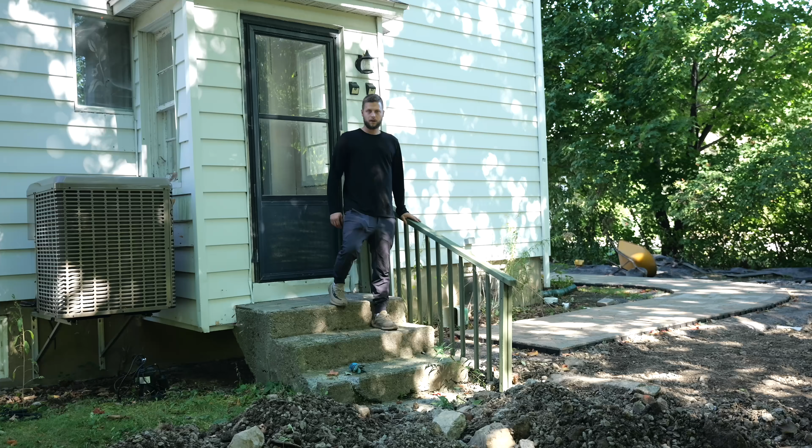Can you guys see the problem? How about now? Now can you see the problem?

In today's video, we're gonna be ripping this off and building a whole platform, a deck, a wooden deck with stairs going this way and towards the backyard.

This is my mother-in-law's house. Recently, I did the entire paver driveway DIY, so you could check out that video afterwards. We're gonna leave the concrete steps there and use them as the foundation for our deck.

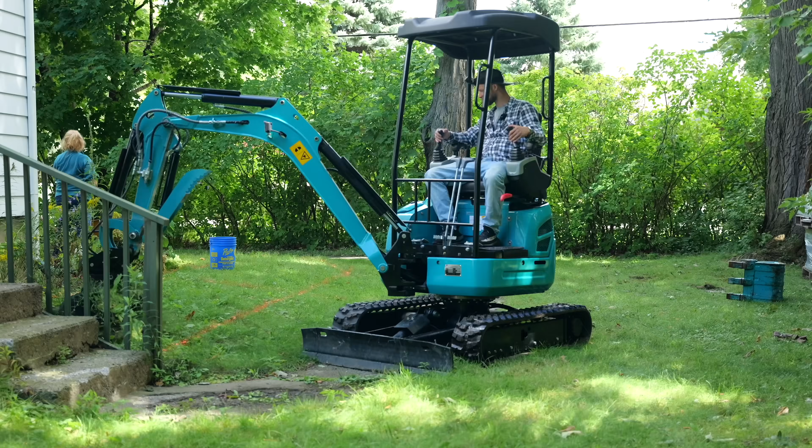So you're probably wondering, why in the world did we make a path here? Well, the previous path was very long, tedious, and all broken concrete, and we decided to level out the whole yard and the entire path all the way to the new driveway we did, having better access and a shorter distance to the driveway.

We're probably gonna go with treated wood. But before that, I wanna show you how I leveled out the yard. So let me give you the inside scoop here.

I posted on Marketplace that I wanted free dirt. Go ahead, I don't want to wreck your movie. Don't worry, it's just a YouTube video.

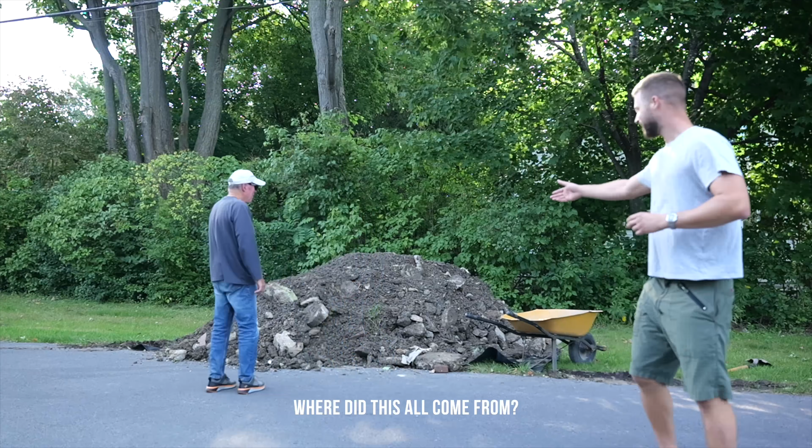What, how I dug a hole? Yeah, about how I just got - where's this all come from? A guy gave me free dirt. He told me there's a few rocks in it. Yeah, it looks like concrete. Oh well, you live and you learn.

That's probably gonna take me a few days. Good luck. Thank you, I'm gonna need it. Oh my God, I don't have the excavator anymore, I only got a wheelbarrow and a shovel.

So yes, Marketplace for this kind of stuff could be good, just like it could be pretty bad. I spent the next couple of days, I don't remember exactly how many hours, but it was a lot.

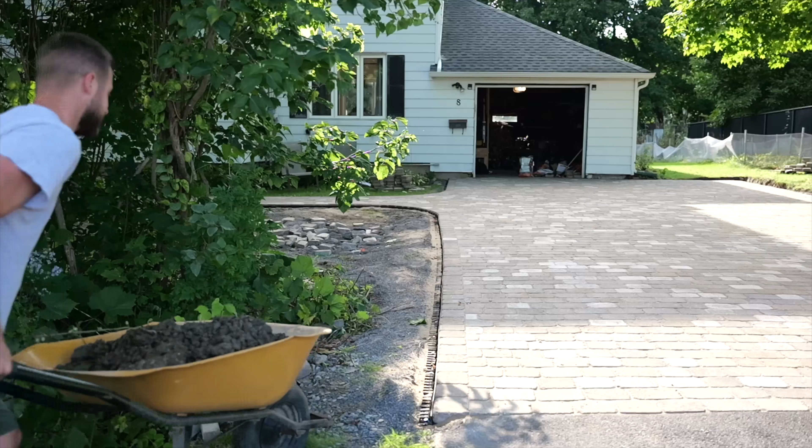In those 10+ hours, I got to experience the difference between a wheelbarrow and a Gorilla Cart. I'm gonna show you why I prefer a regular wheelbarrow versus this $300 Gorilla Cart I bought. It said it could hold up to 1,200 pounds. Just imagine me pulling or even lifting 1,200 pounds of weight.

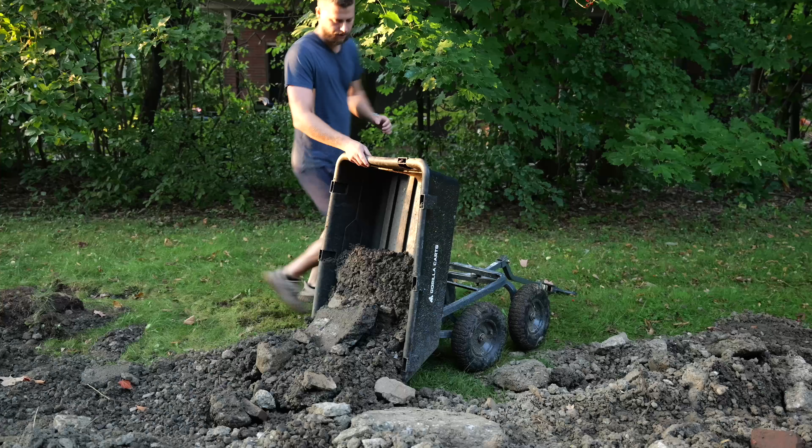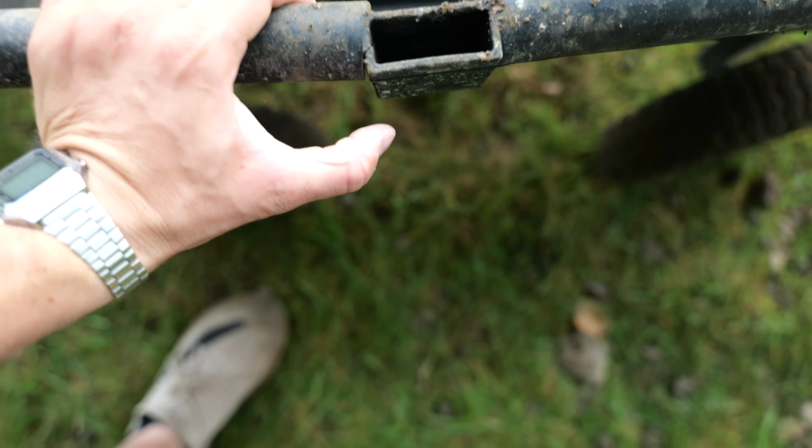It might have a few pros, but I think the cons far outweigh it. It might be good at just transporting pavers or something you want to pick up from it, but as a dump cart, don't buy one. Cracked right there - it just cracked for me raising it up and dumping it. The wheelbarrow, on the other hand, is old school, but it's super damn convenient.

I really thought I was gonna do this all by hand, but I wanted to get back to building the deck, so I rented an excavator for 24 hours to get it done.

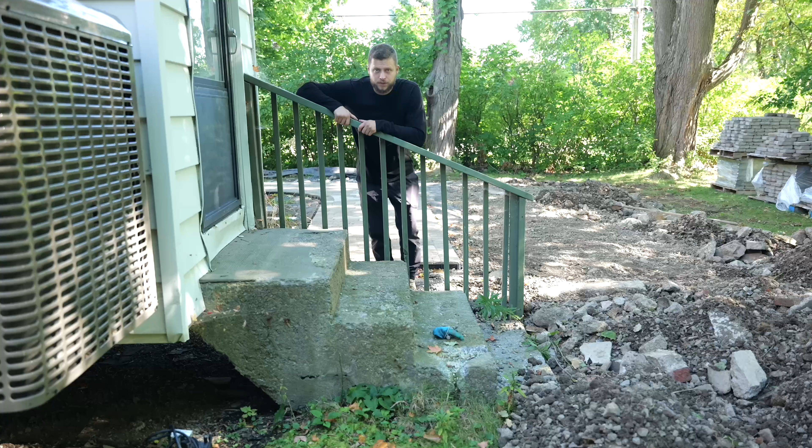Now, let's get back to the deck. So you might have noticed that these stairs look completely destroyed, and that is correct. I believe these stairs are probably 60 years old, maybe a little more. They've been repaired and patched. As you can see, it has definitely settled because it's been many, many years.

So we're gonna leave it right here. We're gonna build on top of it. And that's the challenge today, is to see how we could build it.

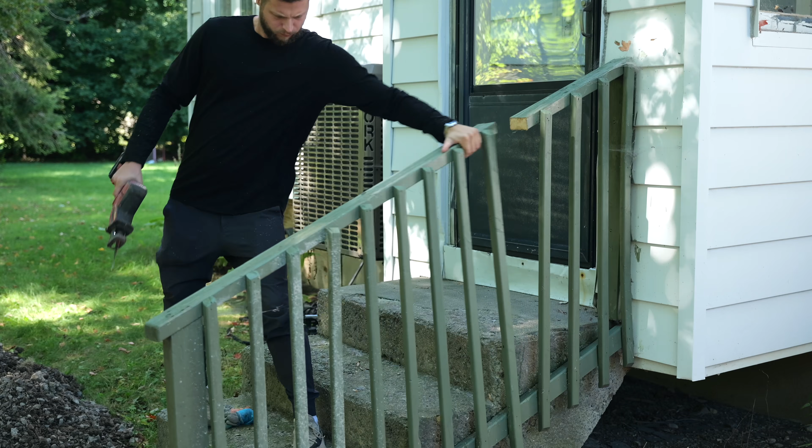It's really too bad that this is nailed in through the siding. I hope we're not gonna damage the siding or... Oh shit. Oh crap. When starting a project, there's always the unexpected, right? Okay, here we go.

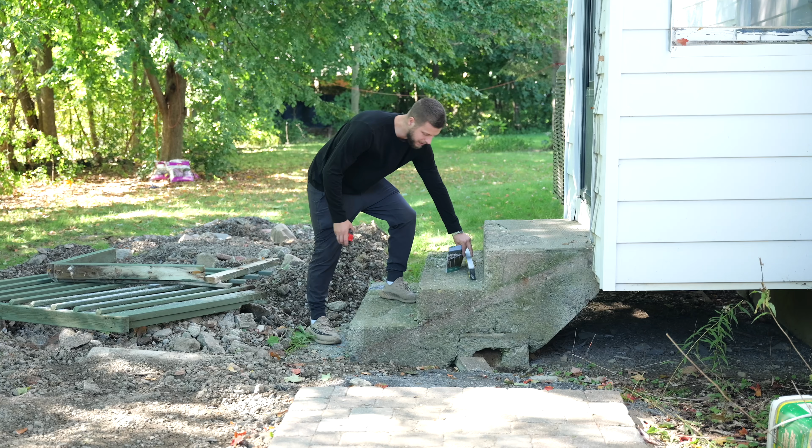All right, now that that's out of the way, I will be measuring. What I want to do now is build out something that comes out of here, elevated, so that we could use this as a base to anchor. That's gonna be the first step to everything.

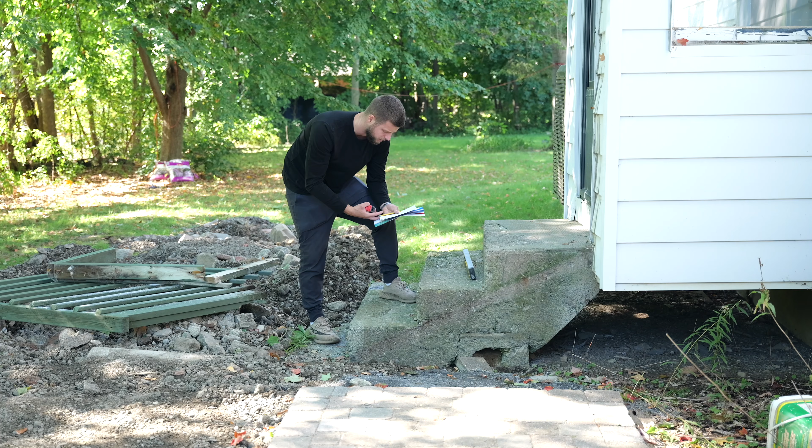So I got my paper and a pencil, and this is how I'm gonna be starting off. I think I want the deck to be about a tiny bit wider than this entire walkway, 55 inches, I'd say, because this is 53. We'll probably go around 54, 55 inches.

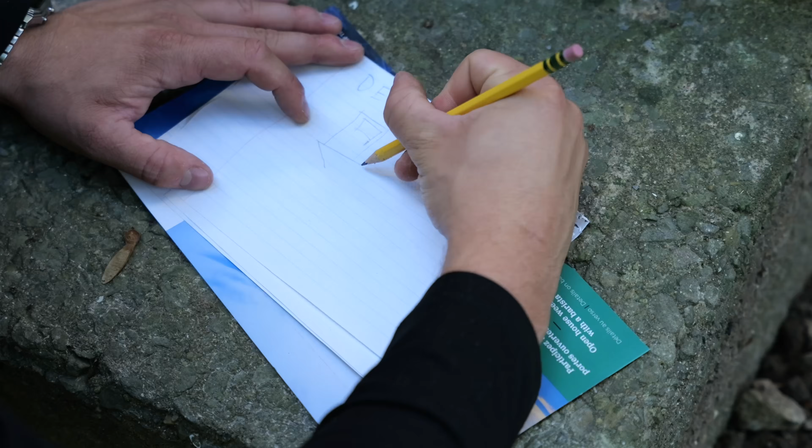So what I want to do is draw out the entire plan, and now I'm going to try and draw something decent. See, that platform is a bit too big, but right now all I want is just to have somewhat of a reference.

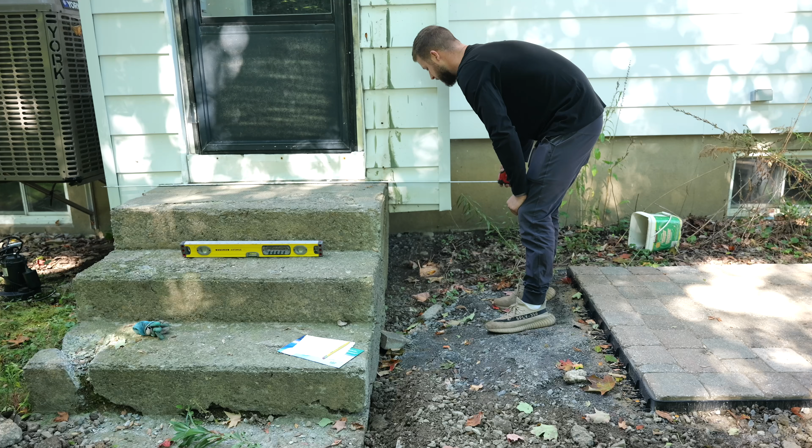So what we want to know now is the distance from this edge to this edge: 4 feet. Steps and a bit further is 55 inches. And just take note, if that's 4 feet and that's 6 feet, then this is an extra 12 inches. I'm gonna go home, have lunch, and draw out a little design.

All right, so I've got all the measurements from the outside, and now it's time to throw this into SketchUp to get a better idea of how we're gonna be building this thing.

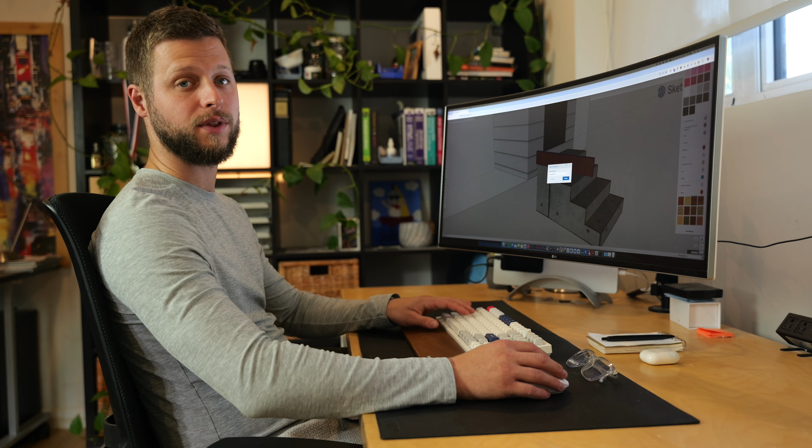We know the concrete steps are 4 feet wide, but the deck's got to cover the whole entrance, and we know that the entrance of the house is 6 feet wide. So I'm designing it to cover the full width of the entrance, and for the length, we're going with 55 inches as mentioned before, so it lines up with the walkway.

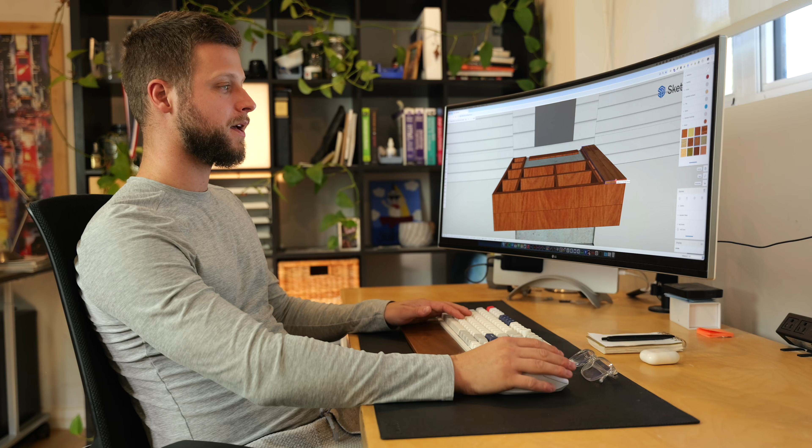Now here's where I've got two options. We can either run the rafters left to right or front to back. Why does that matter? It changes the direction of the deck boards. If we run the rafters left to right, the deck boards will go front to back, which is what I'm leaning towards. This way, when you walk up from the path, you won't see the cut edges on the top boards. It'll be way cleaner.

And to be honest, I'm no contractor or architect. I'm just a self-taught DIY guy who likes figuring stuff out. I learned to use SketchUp because it's simple and gets the job done. It's probably the easiest 3D modeling software out there, and you can learn it too.

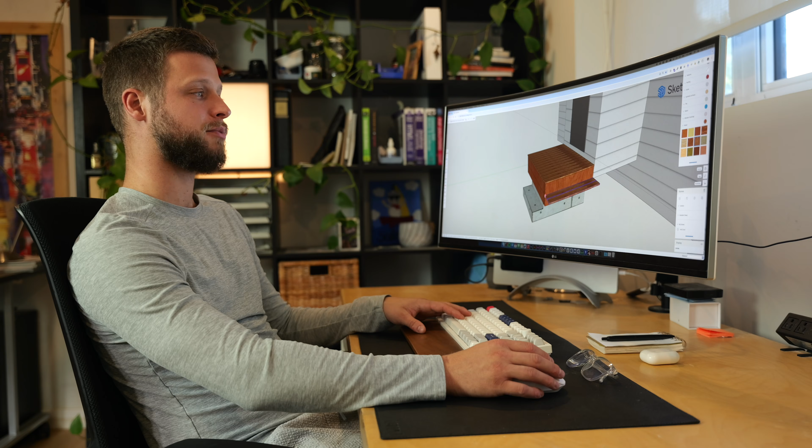Now let's go buy the materials we need to start building this deck.

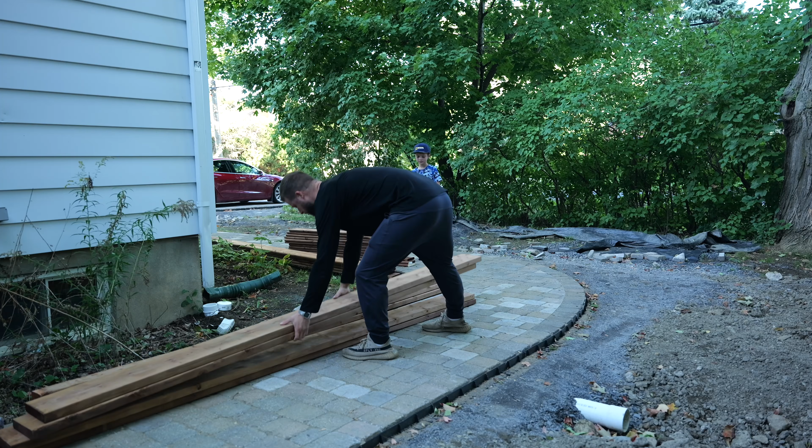Okay, let's get cutting. This is kind of a challenge because I just noticed that this entire concrete step is not parallel with the paver stone walkway.

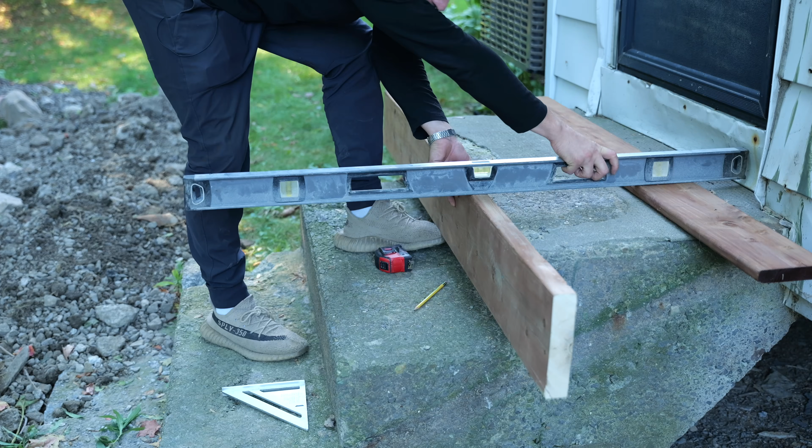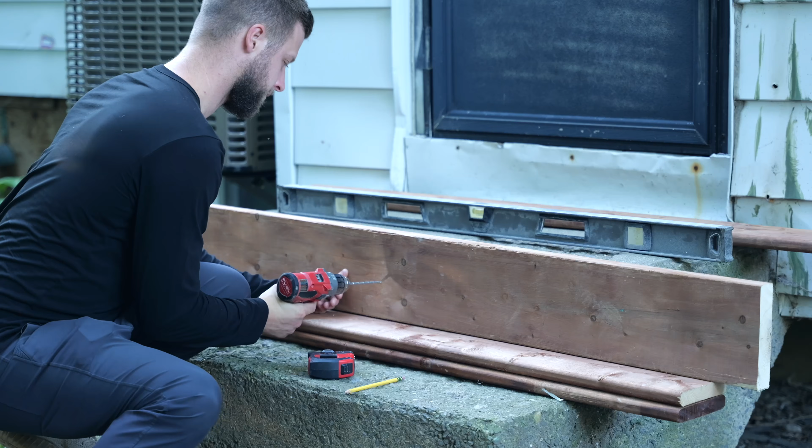Okay. I think that's what we'll do. Okay, perfect. That's perfect. This has the perfect pitch.

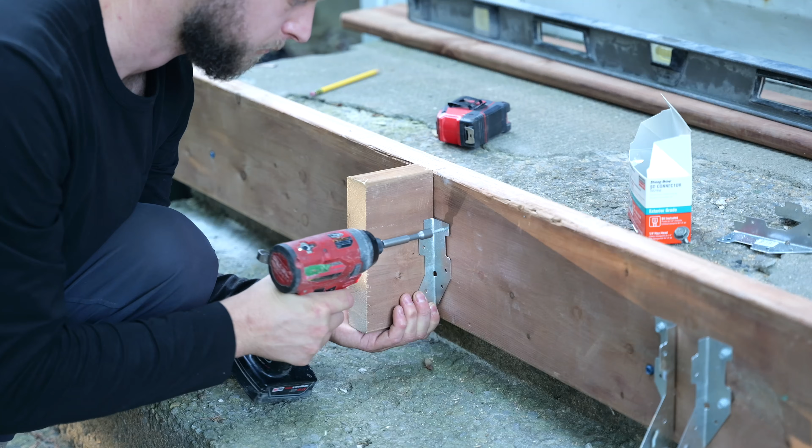You see how this one is kind of pointing like this? It's because it's not perfectly parallel to this, and it's weird because when I did this, I went perfectly parallel to the foundation of the house. So clearly it's this thing that either shifted or they just built it kind of crooked. I think I might just start putting the boards, and then I might cut them afterwards.

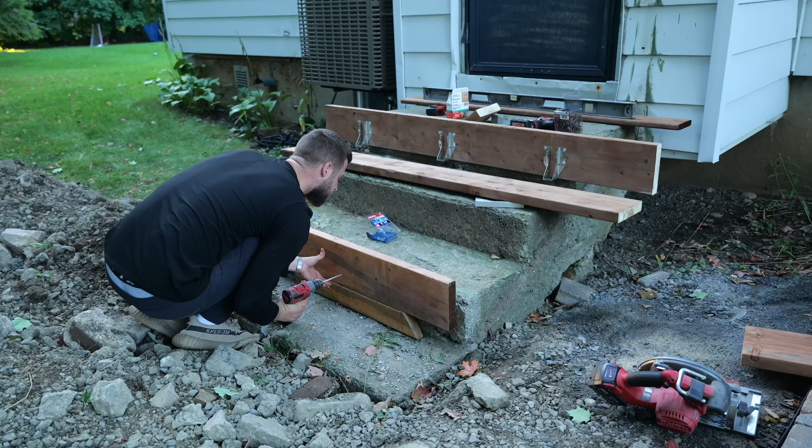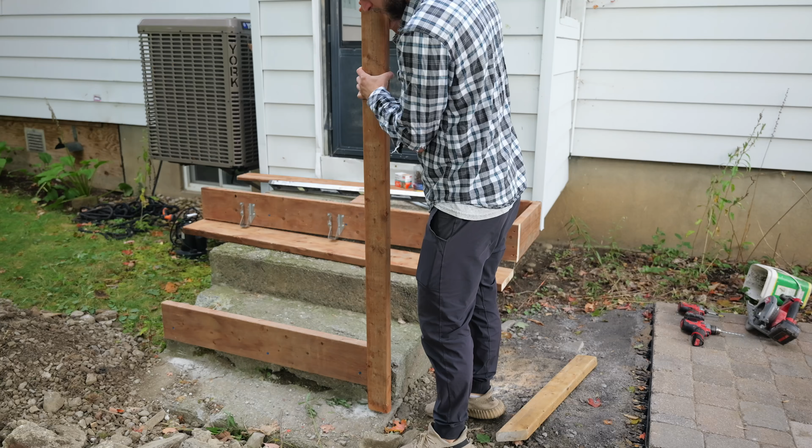Right there. Seven and a half it is.

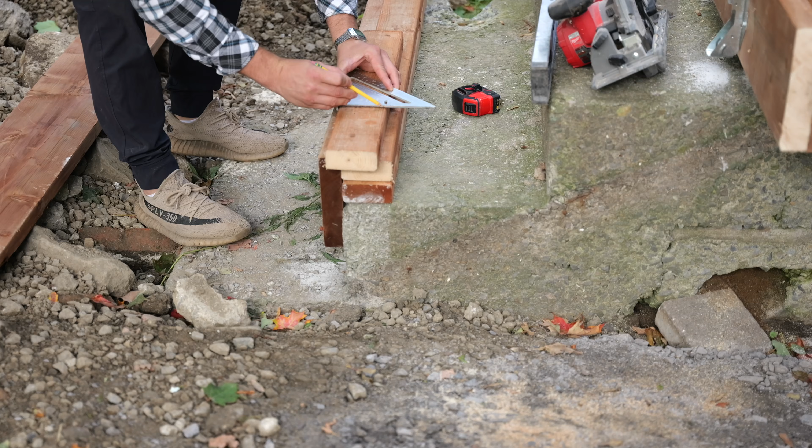One thing I do want to check though, that is perfectly flat and I have about 1/4 inch more on this side. So I know that here I need 7.5. I'm gonna do 7.5, 7 3/4, 7 1/4 maybe. I'm not 100% sure. 7 3/4.

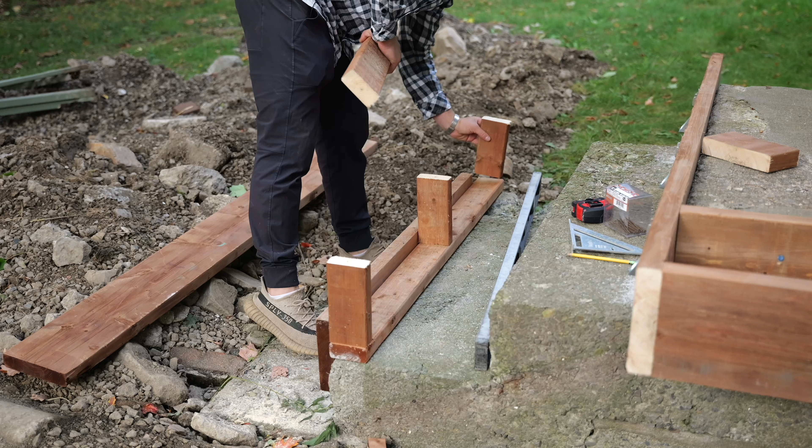Perfectly level, amazing, great. And then we'll be anchoring this either to this board. Yeah, actually this board was pretty useless now that I think about it. That board could have totally been saved. Now I'll be taking my 3-inch screws.

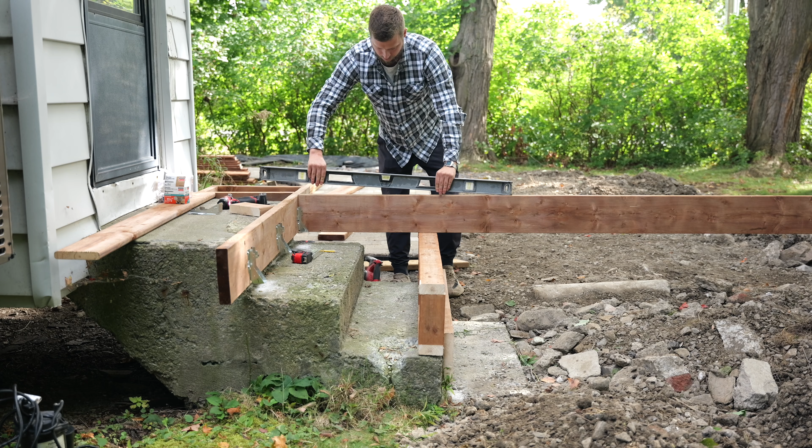Perfect. We're gonna end up cutting these off, but first I want to make sure that we're perfectly parallel with the path.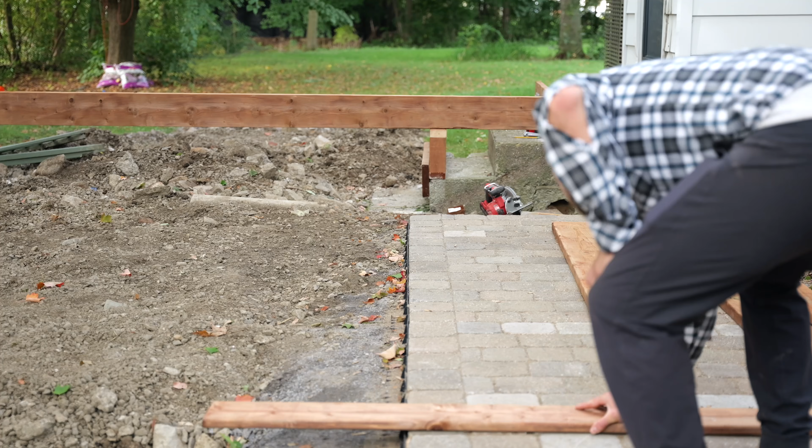After making the driveway video, I realized one thing I really needed was a laser level. I just got a regular laser on Amazon. It had pretty good reviews, and the thing I like, I think the green light—what I read about the green light lasers is that you could actually see them during the day.

So what I'm trying to do now is just line it up so I see the light. So right there I'm a bit off. I'm gonna tweak it just a little bit. Okay, perfect. Right on the edge of the paver. So that right there is kind of where I want to cut it, beyond it, or if I actually want to stop it.

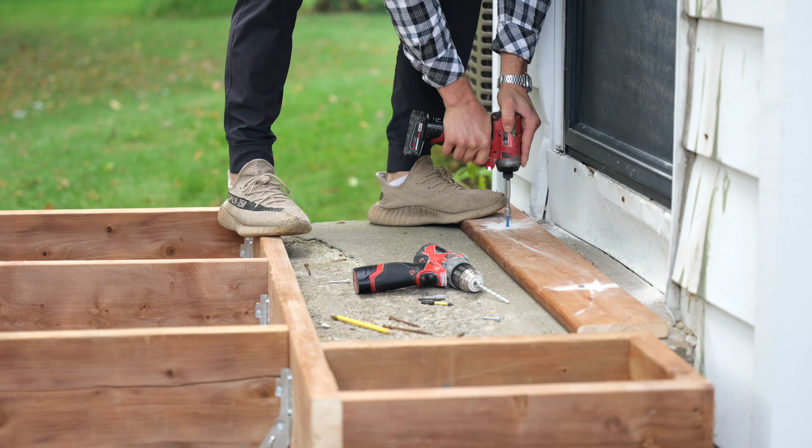That is definitely not perfect whatsoever. As you can see there, there's a pretty big gap. I had made a mistake with my measurements over there. For now, I'm just going to try and make these connections a bit more solid.

Okay, so for this one, I'll be using these. Here I really want to have as strong of a connection as possible.

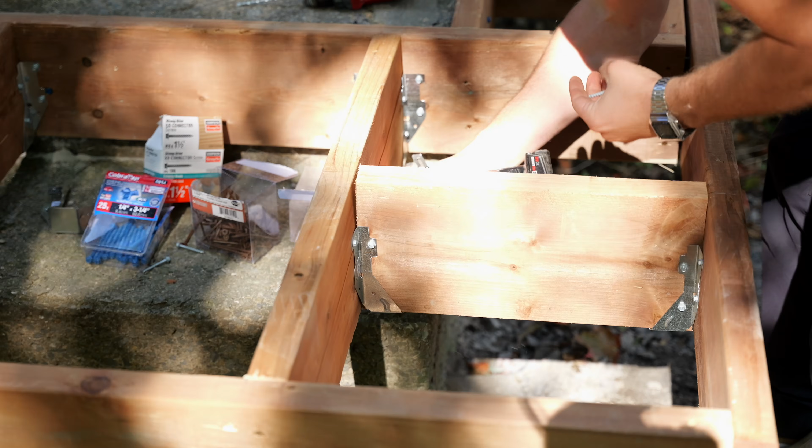See if we cut it right here. Oh yeah, look at that. That's a little bit too high, I think.

By no means am I a professional woodworker or carpenter. I enjoy doing it, and that's why I'm doing it. So I just ran out of pressure treated 2x8s. I'm missing 3-4 pieces here, including the big piece that goes here, and all of the blocking I need to put over here. I'm going to put 2-3 boards over there, just to see how it looks on top. I also need to make a list of how many things I need for the stringers, for the stairs.

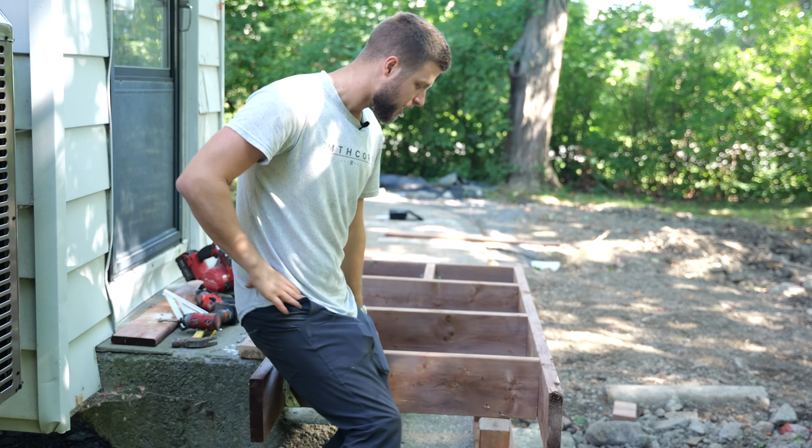Another thing you might be asking yourself is, am I going to put a railing? The answer to that is no. Because we're leveling out the whole yard and bringing in more dirt, and if the deck isn't taller than 2 feet off the ground, you don't need a railing. So that's what we decided to do. We'll see next year - if it's working, great, and if she wants to improve it, we can always improve.

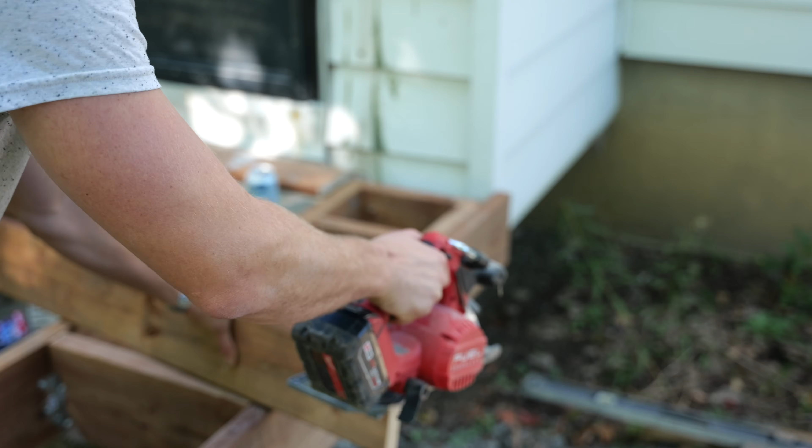Thank you, circular saw, that's all I needed you for. Keep it a little bit off - finger width away from the deck, just to give it a bit of an overhang.

Another thing you can do if you really want to finish off your deck is put more blocking here with more 2x8s or something else. Then you can cut this at a 45 and do like a picture frame all around the deck - it's really, really pretty. I did that on my deck at home. Here, I don't think I'm going to do it.

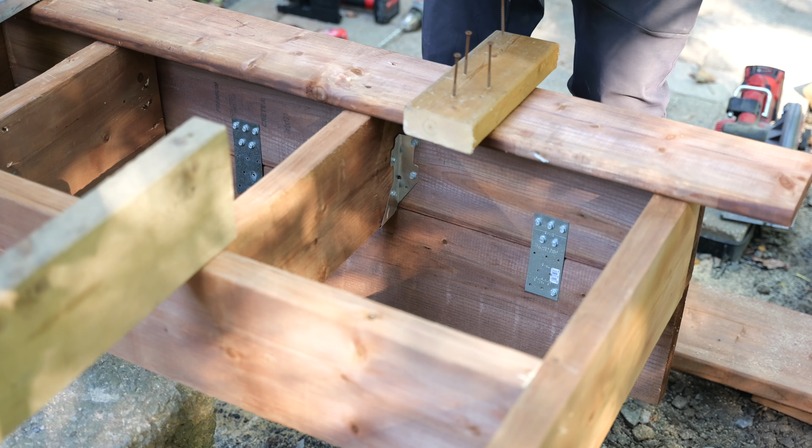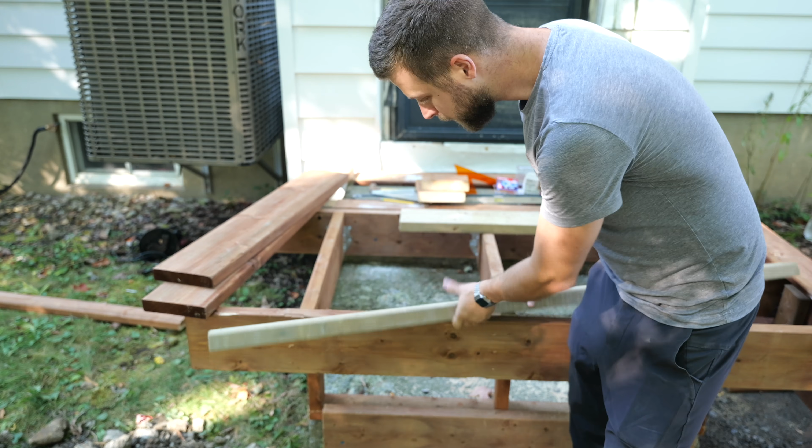I realized I once again ran out of 2x8s, and I want to make sure all of the exterior uses the same wood. This one was inside the garage - it's just the old kind of pressure treated. Back in the day they used to use arsenic, and that's why it's got that green color, whereas the newer stuff doesn't use that poison anymore. They only use copper, and that's why the older pressure treated stuff has more of that greenish tint.

God damn, that's a big knot.

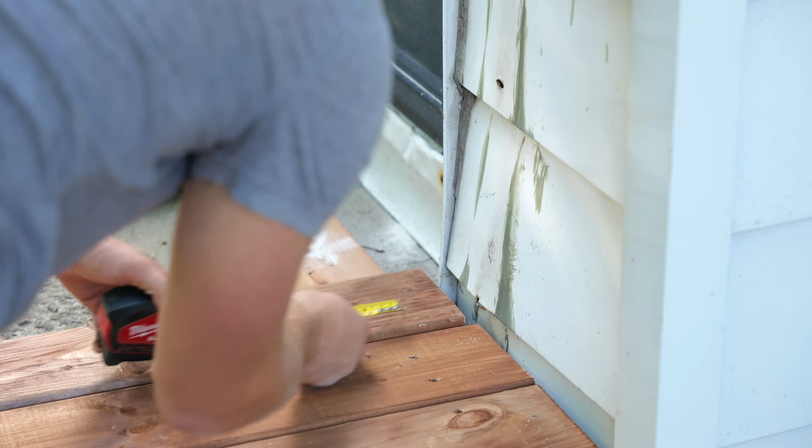I take it back - you kind of need the jigsaw for intricate things like this.

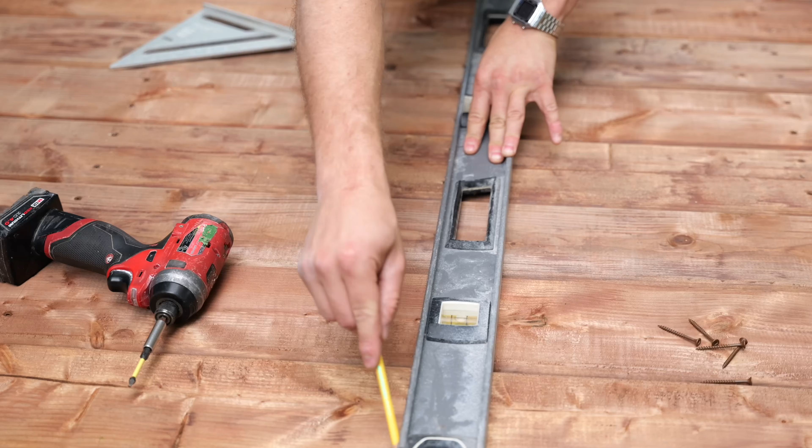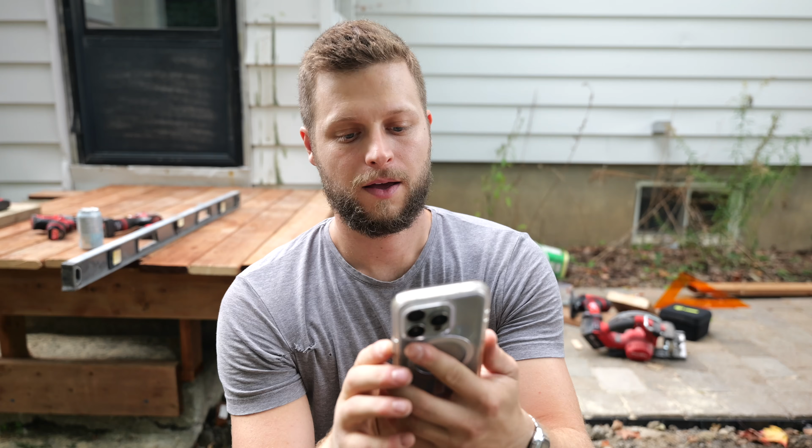So the Blue Jays really chose the best time to start a deep conversation. I'll take this opportunity to try and explain it a little bit better.

Typically you want each step to be somewhere between 7 and 8 inches high - I think that's pretty standard. So the easiest way to calculate all of this and get the measurements you need to cut out your stringers is decks.com. It's the best calculator I've used and definitely the easiest to understand.

After putting in my total rise of 20.5 inches, I divided my total run of 28 inches by 2 because I knew I wanted only 2 deep, comfortable steps. So I chose to make each step run be 14 inches deep. For the tread type, I selected 5/4 by 6 because I'm using 1-inch boards - they're sold as 5/4, but they're actually 1 inch. The key thing here is that you choose the right board, because that will affect all of the calculations.

And lastly, for a stringer attachment method, I chose the standard outside frame option because I don't want the platform that we created to be even wider. I want the platform to act like my top step. And as you can see, this is how the flush option would look like.

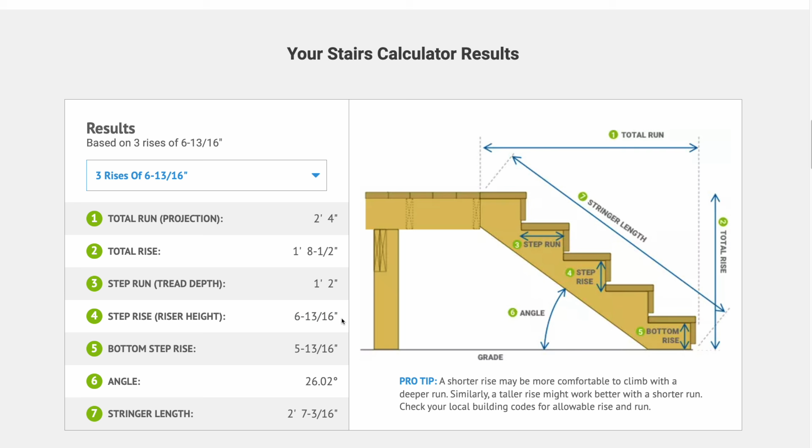After hitting the calculate button, it spits out everything we need. The important numbers we want are the step rise and the bottom step rise. My riser height will be 6 13/16, but I'll simplify this to 6 3/4, and my bottom step rise will be 1 inch less at 5 13/16 because the boards I'm using for the step are 1 inch thick.

And there we have it. That's how you calculate the rise and run for your stringers. Now that the math is out of the way, we could get back to cutting the stringers. Let's go.

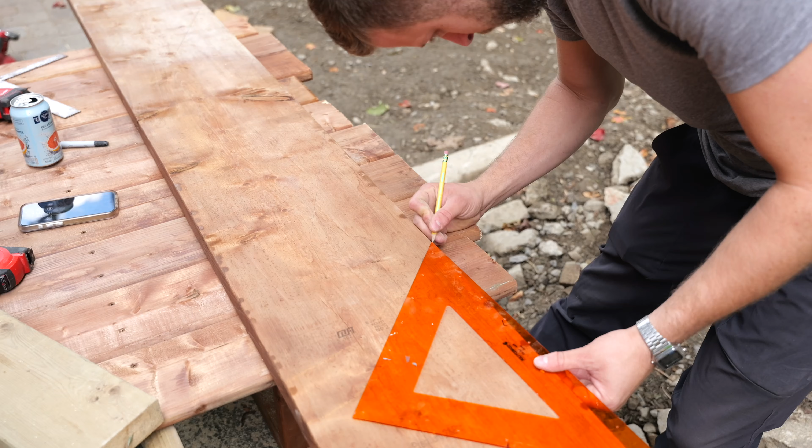The entire 8-foot 2x12 is marked from top to bottom. So the full board is going to be a total of 3 stringers, so 3 times 2 steps.

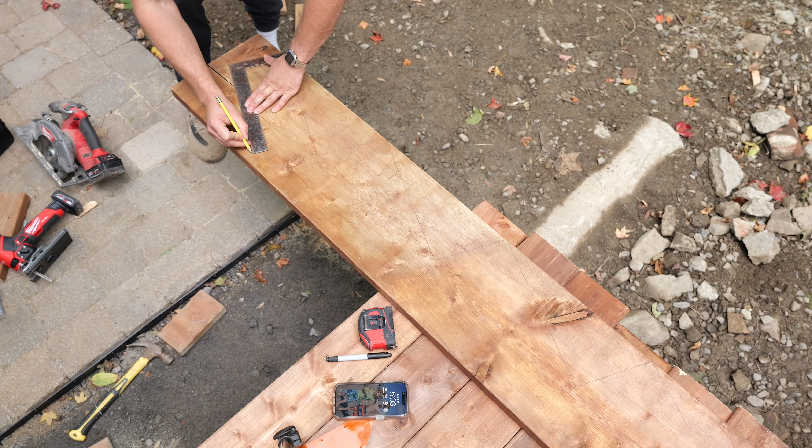Just touching the line. You see, you still see half the line here.

And then I'll probably go buy some more boards for there and finish the other side as well. As you can see now, I'm tempted to put boards here too to hide it. Yeah, I think I'm gonna remove these tomorrow. I'm gonna install these ones first up top, and then these are gonna overhang over this. Then we'll see if I even need to cut off this one. It's about 1.5 inch overhang, which is a little bit much, I think, but damn, that looks good.

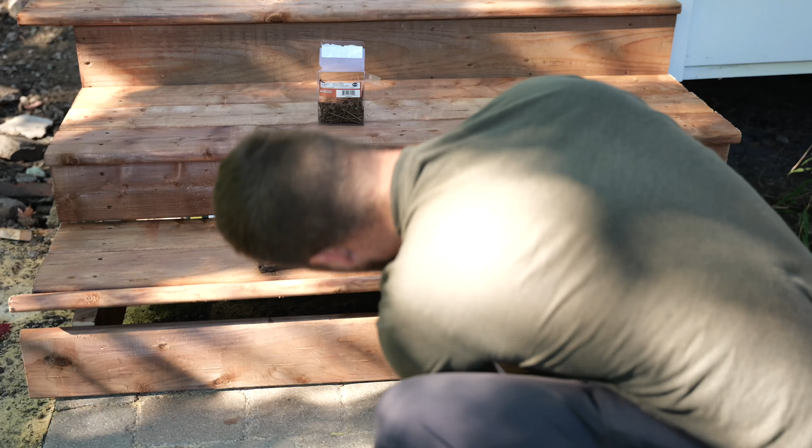Whoa. Sweet. Amazing.

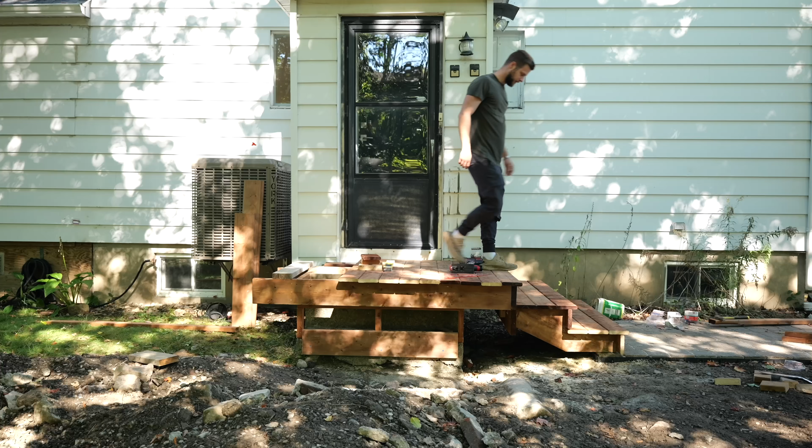I'm gonna add another 2x8 from underneath just for show, just so it hides all of that framing underneath. Hopefully it's prettier with all of the dirt. Just to reinforce it a bit.

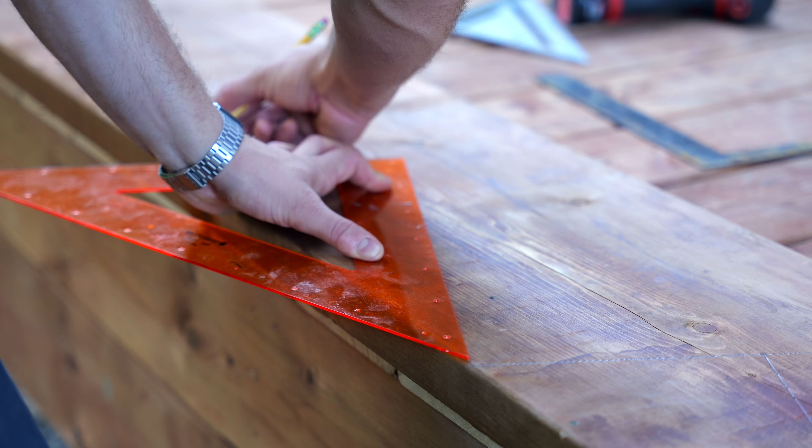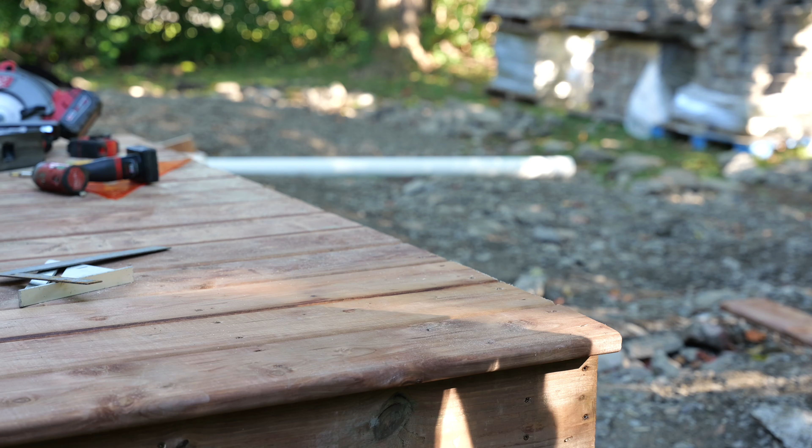On this side, the ground is about 4 inches lower, which meant I needed to create a solid base for the stairs to sit on. That's why I'm pouring concrete, to anchor the stairs and make sure they're sturdy. Once it sets, the stairs will be rock solid, and we'll raise the rest of the ground later with some dirt to even everything out.

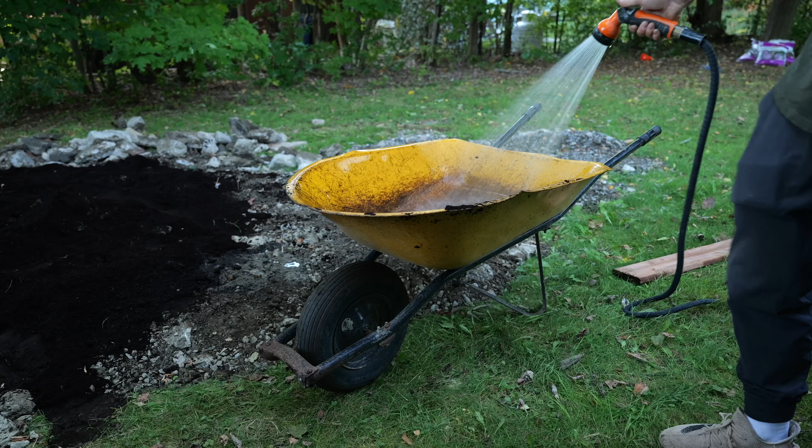On the other side of the deck, I didn't need a concrete base. Those stairs were sitting right on our finished paver floor, so I could just place them on there directly. Maybe a bracket and some screws would have been a good idea to hold them in place, but for this project, I left them as is.

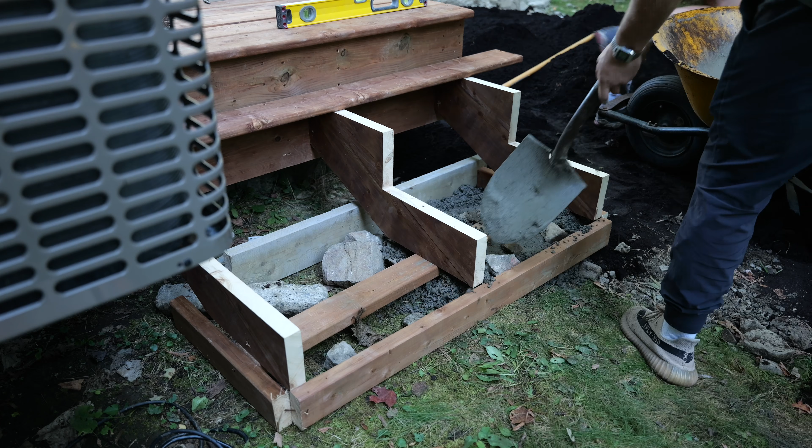With the deck almost done, I wanted to take it a step further and make everything look just right. So I decided to clean up the old siding. It had some ugly green paint on it, and I figured a fresh coat of white would brighten things up for the big reveal.

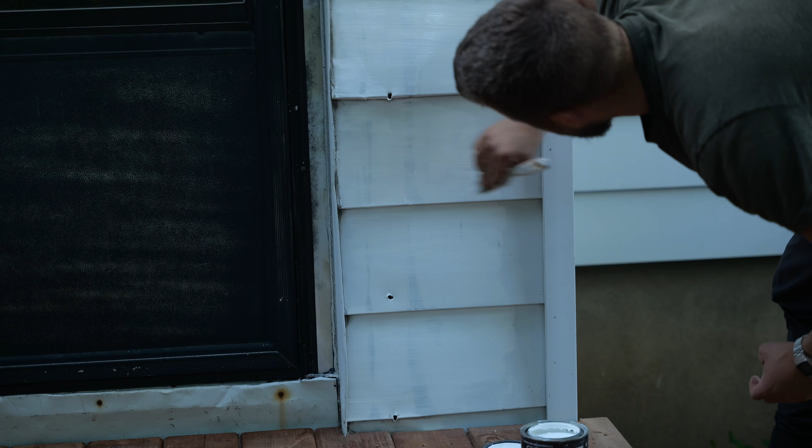Sometimes it's the little details that make the biggest difference. A clean, fresh look goes a long way.

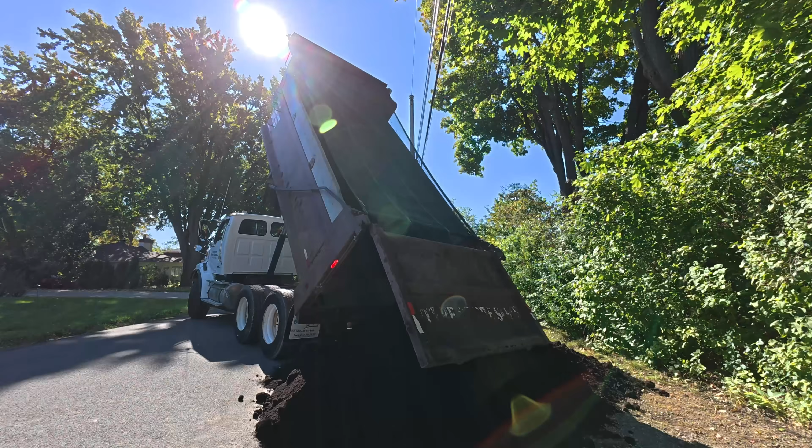All right, I got 10 tons of nice black dirt, nice topsoil to fill up the front yard and make it all beautiful. While I finished up with the deck, I had to get the brother-in-laws involved, so I got them to do the wheelbarrow and all of this shoveling.

Everything's clean and looking great. I can't wait to see my mother-in-law's reaction.

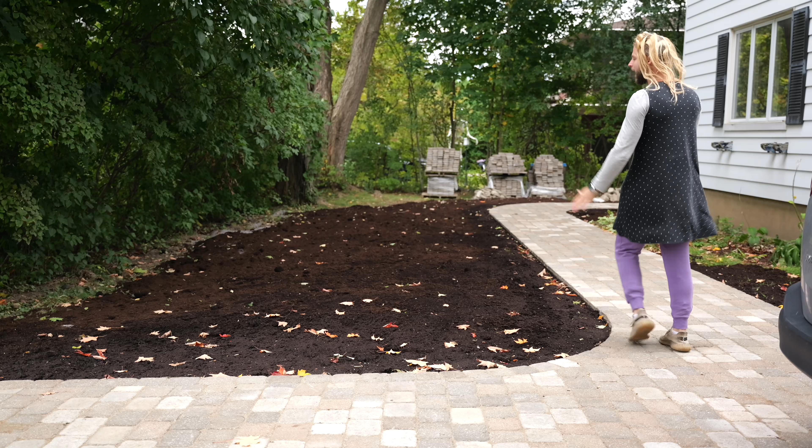Alrighty, we have arrived. Oh my goodness. Mateo? Oh my goodness. Mateo, you did this? Oh my goodness. Do you like it? Are you kidding me? This is amazing. Would you look at this? Would you just stop and look at this? Look at these curves. Oh, would you just look at it? I can't believe this. This is amazing. Would you just look at it? Oh my goodness. Are you kidding me? Would you just look at this deck? Just look at it. Oh my goodness. Mateo, you're a genius. I could do, oh, this is how I'm gonna get my steps in now. Oh my God, there's stairs on both sides. I love it. Mateo, how did you do this? Oh my goodness, and this walkway is so perfect. I can maybe speed walk. Oh my goodness. Thank you so much, Mateo. Take a look at this, and then take a look at that. Oh, my favorite son-in-law.